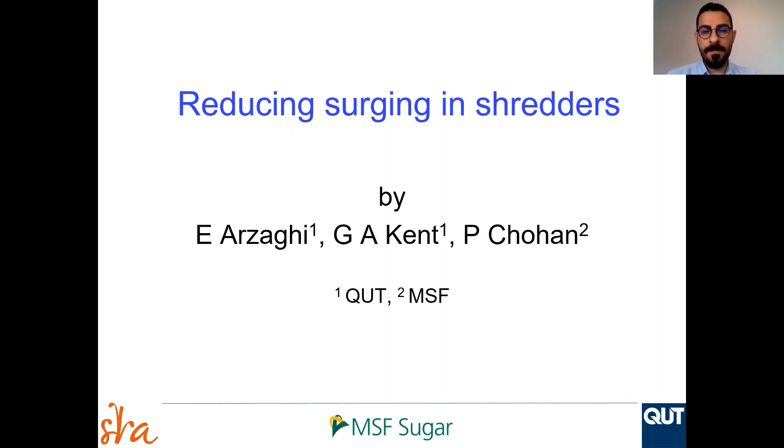Well, this project was initiated because of a specific problem at Tableland Mill, which is surging in the shredders. Surging in the shredder requires the mill to adjust the grid of the shredder to a wider distance, and that will in turn reduce the level of cane preparation below what we desire to have, which is causing a loss for every mill.

And basically, we would expect this problem to be more prevalent across the industry because the industry is trying to be more energy efficient by using electric motors. And electric motors are less forgiving when it comes to surging. Surging will significantly impact electric motors by reducing their lifespan, and it will turn into huge consequences for every mill.

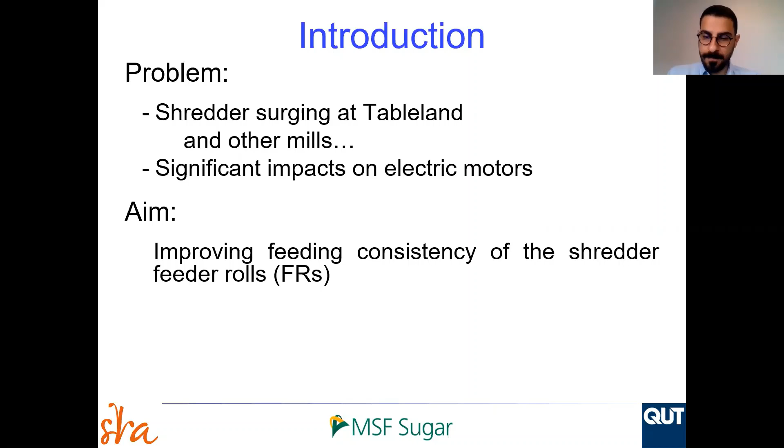So our aim is basically to improve feeding consistency of shredders using feeder rolls. To achieve that aim, we've set a few objectives, which are basically investigating current shredder capacity and comparison with industry standards for Tableland peak crush rates, and also modifying the setting and design of feeder rolls at Tableland Mill,

developing a theory of operation of shredder feeder rolls for us to be able to develop guidelines for design and operation of shredder feeder rolls. And we would like those guidelines to be applicable to other mills across the sugar milling industry.

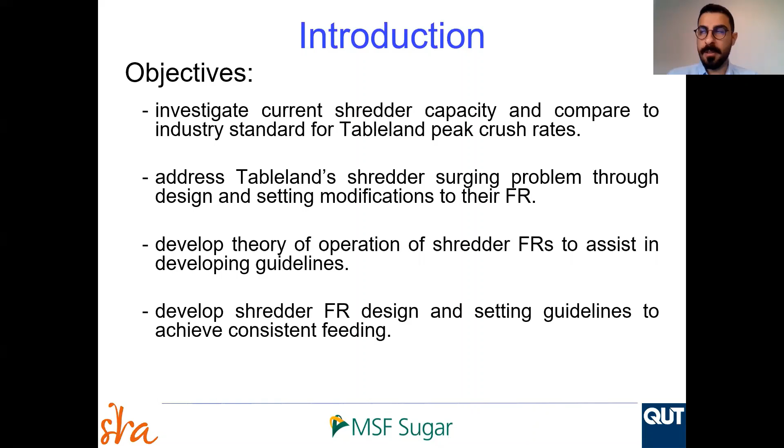Peter Chohan at Tableland has previously designed and built a model of the actual feeder roll, which is scaled down to 3.4 times smaller than the actual device. And the feeder roll has a 370 millimeter length. The feeder rolls are run by a variable speed drive, which is able to provide a maximum rotational speed of 6 rev per minute on the feeder rolls.

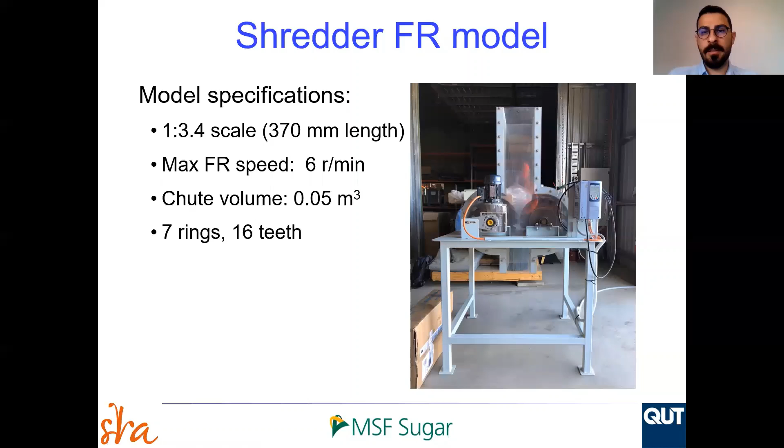As you can see in the picture here, the chute volume is around 50 liters. And with the current feeder rolls on the model, there are 7 rings of teeth, each ring having 16 teeth. We are planning to use this equipment for our experiment, but we would certainly need, and we are doing it at the moment, to modify it to be able to make variations in the design of the feeder roll.

Since the feeder roll is scaled down, we try to investigate how we can reflect on actual billet sizes that are being prepared before milling, and to be able to control the material size in terms of billet diameter and billet length. We have concluded to use timber dowels that will allow us to particularly select diameters and lengths that we want to try to run tests with.

However, there is an issue with using timber dowels, and that's a significantly lower density in comparison to actual cane billets. And to eradicate that issue, we try to see if we are able to soak dowels in water and see if we can increase the density.

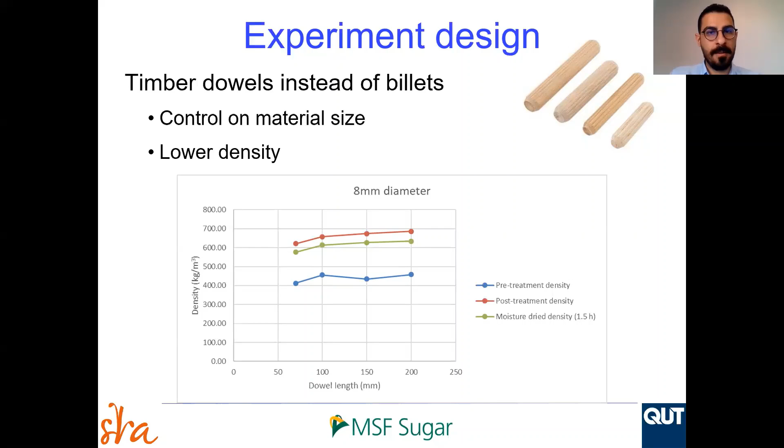To design the experiment, it was important for us to reflect on the actual design and operation of feeder rolls across Australian sugar mills. That's why we conducted a survey about different designs of feeder rolls and how they operate their equipment. 11 mills responded to our survey, and those are the mills that actually have feeder rolls on their shredder. And we have finalized the design of our experiment based on the responses we got.

And as you can see in this table, we are going to use a split plot to run the experiment. One of the parameters that are important for us is dowel size, and to have a good variation of sizes, we have planned to use 6mm, 8mm, and 10mm diameter dowels. And we are going to change the length of dowels at each treatment from 32mm to 50mm. The other parameter that we are going to change is feeder roll speed. And we're considering a good variation, which is 3 rev per minute and also 6 rev per minute.

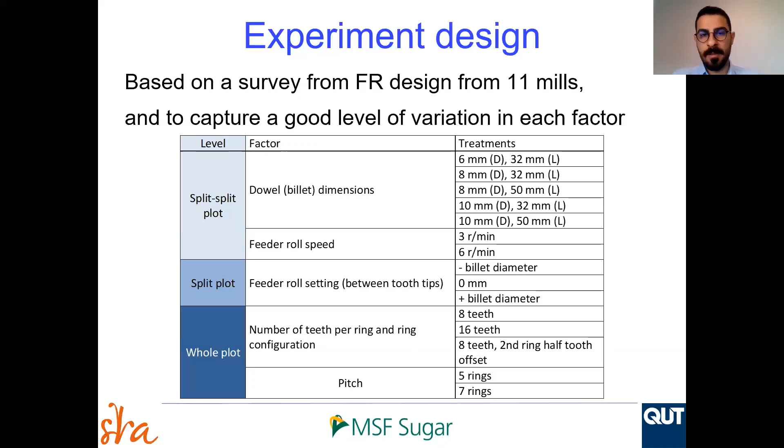We're also going to install 2 GoPro cameras, one just across the center line of the feeder rolls and one a little bit higher up around the chute height, to be able to see how feeding is actually done throughout the test.

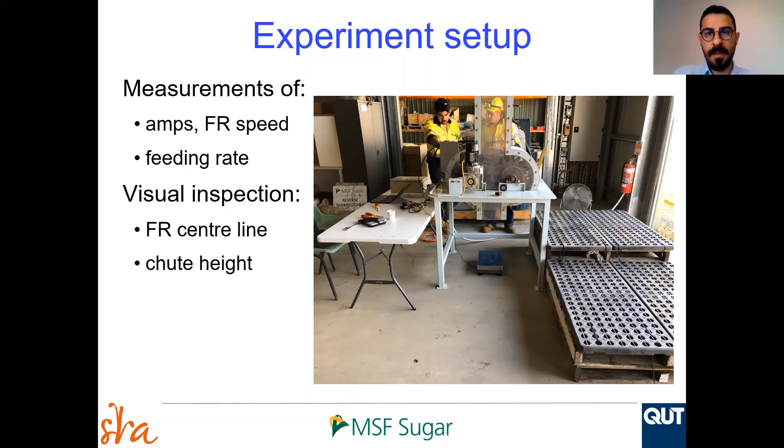We have set the model at Tableland a couple of weeks ago and did some preliminary test trials, but we actually used wood chips because we were not supplied with the dowels at that moment. We recorded the feeder roll speed and the current output from the VSD, and in a few seconds I'm going to show you a couple of trials that we have done. And this particular test was for the maximum speed of feeder roll, which was 6 rev per minute. I'm going to start the video now.

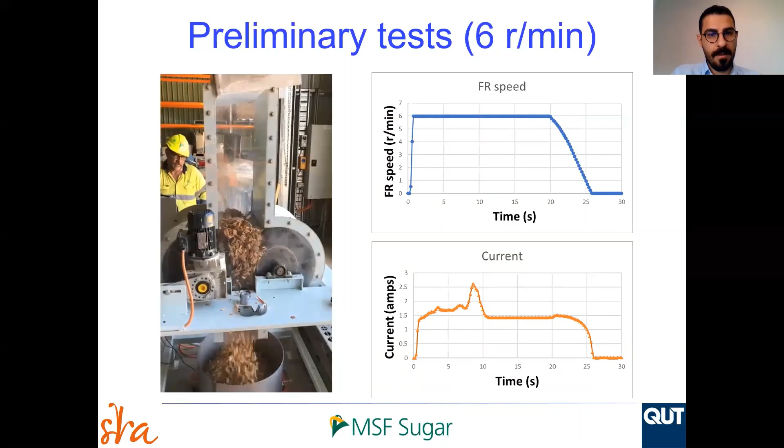The aim for this trial was basically to understand if we are able to acquire the data that we want, and also the variations and the changes in speed or current. And as you can see in the current, in the bottom plot, we have managed to capture the changes in amps throughout the test. And that is basically what we want to see for being able to measure power consumption and changes in that parameter.

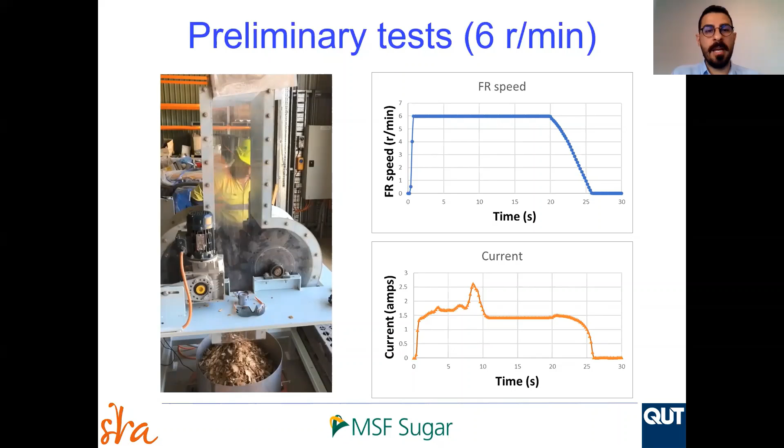The second one that we did, and it turned out to be very interesting, was with half of the speed of the previous test, which was 3 rev per minute. I'm going to start the video. So as you see, the feed rolls choked. We are yet unsure if it was because of the strange dimensions and texture of wood chips that we used, or actually the motors basically jammed because of lower speed and

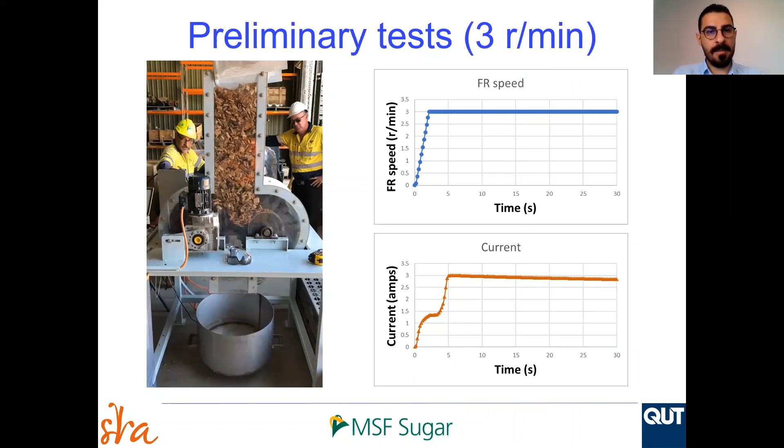not enough torque. And if I compare it to the previous slide, the average output current was around 1.5 amps, but when we had the choking, the amps increased from 1.5 to 3, and that shows that basically we are able to see the changes and understand where the problem starts.

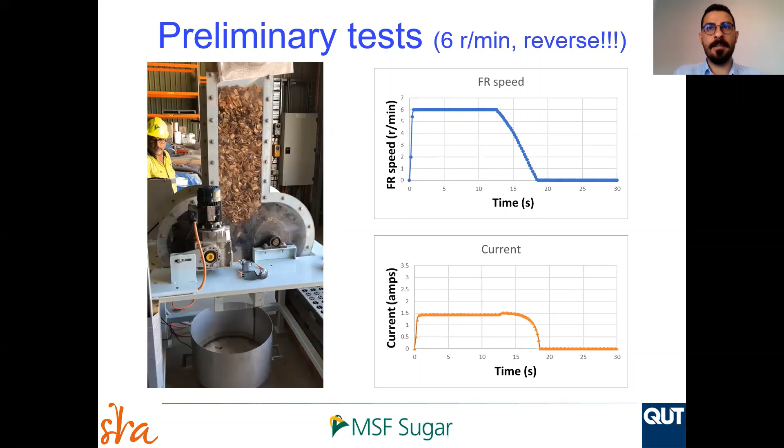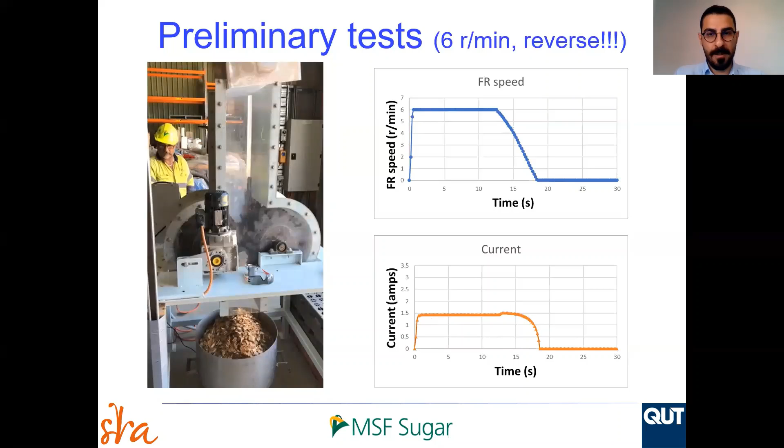The last video that I'm going to show you is basically when we try to understand what is going to happen if we change the rotation direction of the feed rolls. And I'll let you see what is happening. You can see that there is a significant damping effect when we try to reverse the direction of feed roll rotation, but as far as the parameter observation goes, the test has been very nice on amps and speed of feed rolls.

So the future steps are basically to complete the experiment, reflecting on the parameters that we are planning to change. Once we complete the experiment, we will statistically analyze the results to see the significant effects of each parameter on power consumption and feeding rate. The next step will be to develop guidelines for feeder roll design and operation that will be performed based on the theories that are available for 2-roll mill design and operation from Dr.

Kent's thesis. After that, we are going to implement the changes based on the guidelines we've developed at Tableland Shredder. By comparing power consumption on the shredder before and after the changes are applied, we are going to make judgments of how effective the guidelines are and make necessary recommendations. And we are hoping that the result of this study will help other mills with feeder rolls to improve their operation and benefit from the results.

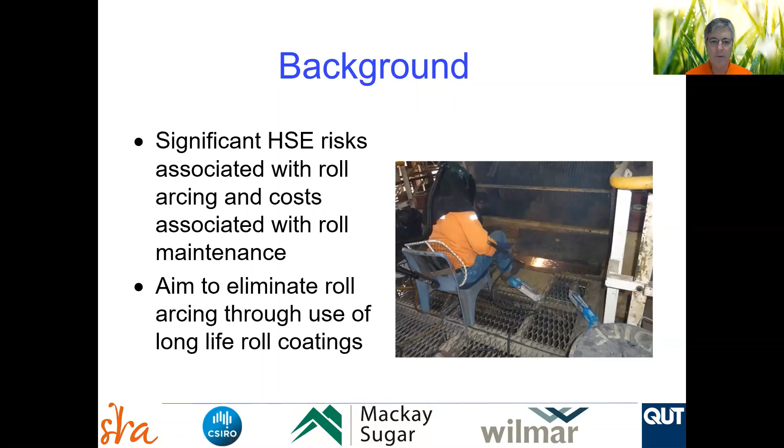What we're trying to do, as the title suggests, is to get to the stage of actually eliminating roll arcing through the use of long life roll coatings, a topic that we've been working our way towards for quite a few years. The two technologies that we have available have been worked on since the 1990s.

Firstly, the tungsten carbide chips for putting a rough and durable coating on the groove tips has been around since the 1990s. And in our previous project that finished a couple of years ago, we looked at the idea of using laser cladding to put a durable coating on the flanks of roll grooves.

And so in this project, the objective was to have a go at both different techniques and to see whether either or both of these technologies can give us a better all-round result in terms of the ultimate costs of maintaining the roll surface.

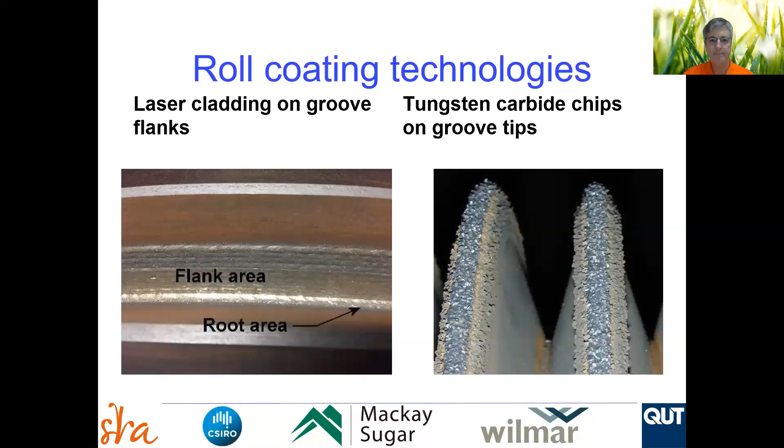So if we look at the project objectives, we're looking for the coating technology, as I just said, that minimises the roll shell maintenance costs. And I'm using the word costs in a very general sense because I include the health, safety and environmental risk costs as well as the easily defined direct costs.

From the previous work we've done, one of the biggest limitations is not so much on tungsten carbide, because we've done that before, but determining service life. And when you're looking at the economics of spending additional money up front to prepare the surface for the season, you need to get a certain life out of that surface to be able to justify that cost. And the laser cladding is something we have not yet had a chance to look at in service.

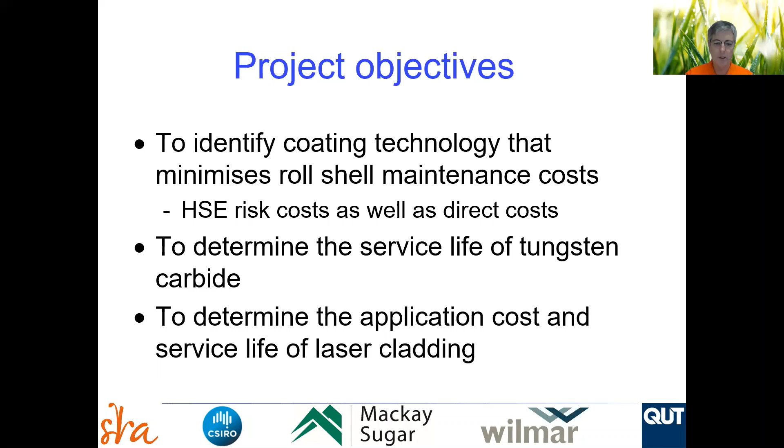So as I said, this project only started 4 weeks ago, and what we have planned for this year, and we've started doing already, is the first 2 stages of the work. The first stage is a baseline evaluation. So it's really about us trying to gain a good understanding of the true costs of the current roll arcing process and the other roll shell maintenance costs that are currently sustained.

The second part of this project is associated with the preparation of a roll to go into service at Racecourse Mill this year. So firstly, just talking about the baseline evaluation, this work is getting close to completion. We did start late last year in terms of providing a survey to go to each of the milling companies to seek out the actual costs of roll shell maintenance. And we did get responses from six companies, covering a total of 15 mills, which was nice to see.

We followed that up last week with some interviews at Racecourse and Pioneer Mills to try and quantify the other costs. So this is where we're trying to get down into the difficult territory of trying to assess what the real costs are associated with health, safety and environment. And to do that, we spoke to a number of roll arcers themselves. We spoke to other people who work around the milling station, like roving drivers, console operators, shift supervisors.

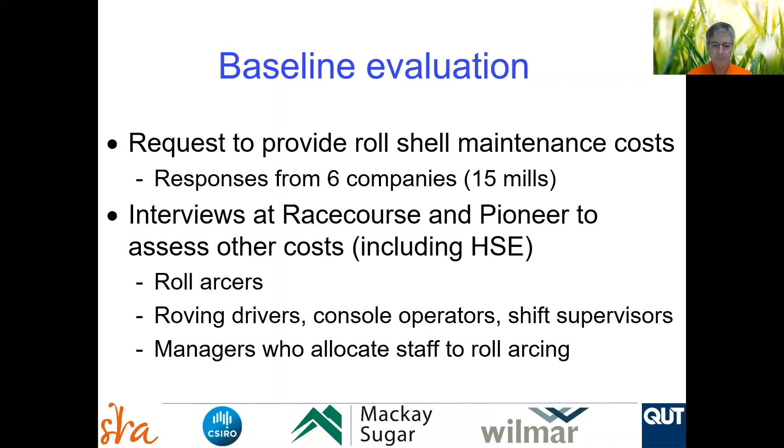Now, moving on to the roll preparation task, we are planning to coat the Racecourse number 5 top roll. Number 5 mill at Racecourse is a 6-foot mill, doing 500 tonnes an hour. So it's a reasonably significant duty. The experiment itself, and this is a plan that got updated yesterday. So I'm actually at Racecourse Mill at the moment, and we've been working since the beginning of last week trying to get this roll preparation work underway.

The plan at the moment is to look at 3 cladding materials on the flanks of grooves, and also look at the case of not putting any cladding on the sides of the grooves. In terms of the tungsten carbide, we're going to put it around the tips of the grooves. We're looking at either 3, 5 or 7 runs of tungsten. So with 3, what we're talking about is one run around the tips of the grooves and 1 on either side, going up to 7, which is one run on the tip and 3 runs on either side.

So when you're looking at 4 different cladding treatments, 3 cladding plus no cladding, and 3 different treatments of tungsten carbide, 4 times 3 is 12. So we've got 12 experimental grooves that we'll be assessing this year on this one roller.

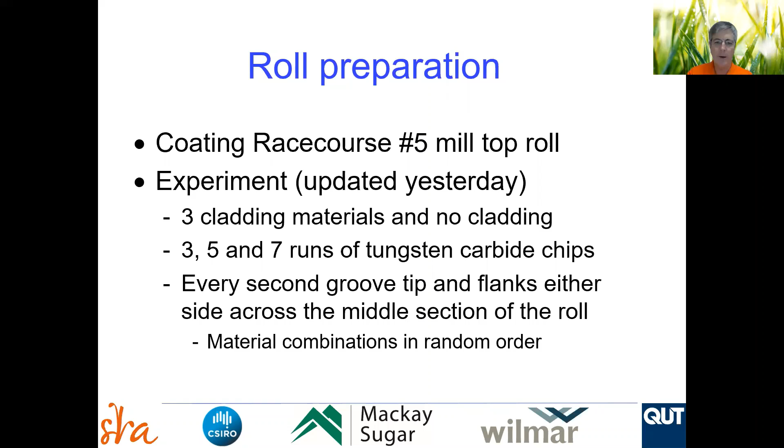Okay, we were going along very nicely until Monday this week, and the coronavirus eventually caught up with us, unfortunately. We were within a day or two of being ready to start laser cladding, when unfortunately the CSIRO staff we had with us up from Melbourne were recalled by CSIRO due to the various risks associated with the virus. So that's caused a change in plans that we're currently seeking approval for with SRA.

But essentially what we have planned is to replace the laser cladding on the sides of the grooves with cladding using MIG welding, which is a process that SWP have been working on in the last couple of years. It was a process that we didn't think was suitable for the task when we designed this project originally, but we did plan up until yesterday to have one MIG welding coating to compare against the laser cladding, but now our plan is to use MIG welding for all of the treatments.

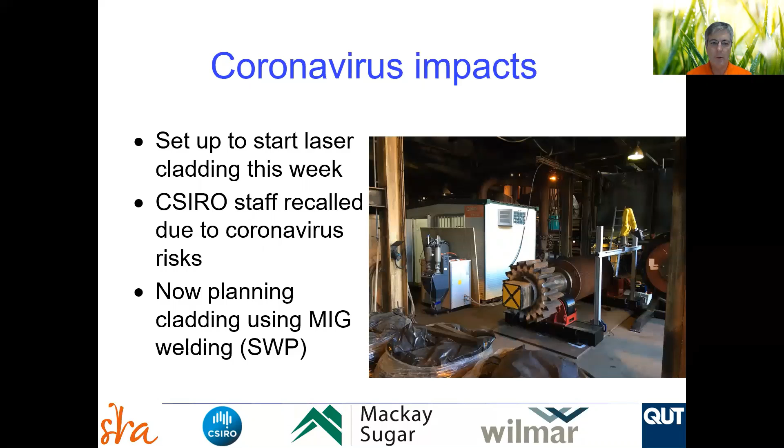So we are also planning to do some comparisons to other roll shell treatments. We have a number of different cases to consider. At Racecourse, we have, I guess, a convenience of having 3 6-foot mills, one after the other in the milling train, and they are all different. So Racecourse number 3 top roll this year, the shell is from Bundaberg Walker's Material A, grey cast iron Material A. It's going to be conventionally arced. Racecourse number 4 top roll is Bundaberg Walker's Material B, also going to be arced.

And we are also going to do a comparison with Plane Creek's number 5 top roll. So Plane Creek being the mill adjacent to Racecourse, fairly similar rate, and I guess the bigger difference is that it's a 7-foot mill rather than a 6-foot mill. But one of the advantages of it is it is going to have tungsten carbide on the tips, and I understand it's also going to be clad on the flanks. So that will be an interesting comparison, given that it is a Bundaberg Walker's Material B roll compared with our Racecourse number 5 top roll, which is an SG iron roll.

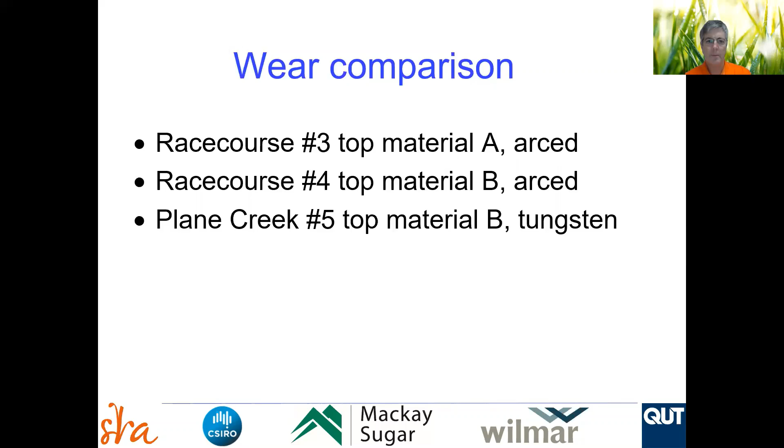So where we're at, the first real milestone, milestone 2, covers the baseline evaluation. It's due on the 1st of April, and we're working as hard as we can to meet that milestone. And then we have the following milestone, which covers the preparation of the Racecourse number 5 top roll. And our objective, of course, is to get that roll into service this year. And it's also to do some measurements, not just of diameter, but also of the groove profile of each of these 4 rolls, so that we've got something to compare against at the end of the season. And that milestone's due on the 1st of August.

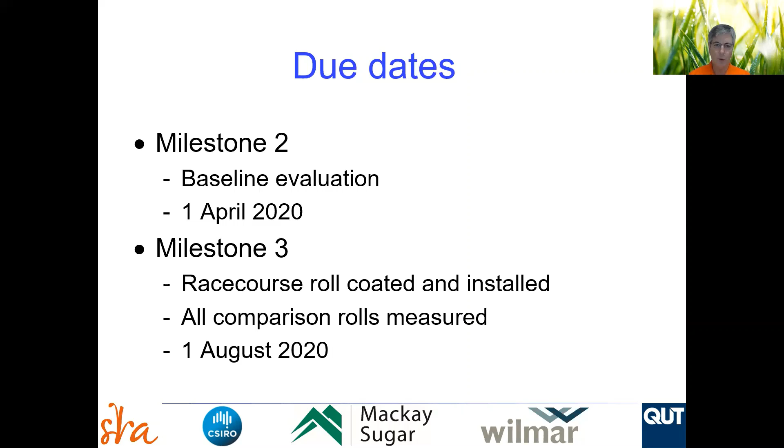So just a few extra acknowledgements. I couldn't fit everyone onto the co-author list. From Mackay Sugar, Marty Iten has done a brilliant job in terms of organising our cladding facility. As you saw in the photo earlier, it's pretty much all set up and ready to go. Magella Daly is the HSE coordinator here, who's had a fair input into preparations for the work we're doing.

The CSIRO team, Tony Kilpatrick, Con Philippou and Hans Law, have been up here preparing for the laser cladding. Unfortunately, we didn't quite get to the point of utilising them. And Dale Johansson from SWP, who'll be doing the tungsten carbide and MIG welding for this season. And also a big thank you to Glenn O'Malley from Wilmar, who organised the interview process at Pioneer last week. And of course the funding for the project from Sugar Research Australia.

Okay, thanks. I'm guessing all roll shells under trial have a 1.5 inch or 40 millimeter pitch times 35-degree grooving. Is that right? Yes, that's correct. I think that's correct for most of them. I've got Steve McLaughlin from Racecourse here with me, so I might just push the camera around in his direction. Yeah, number 5 top at Racecourse, it's a 38.1 millimetre.

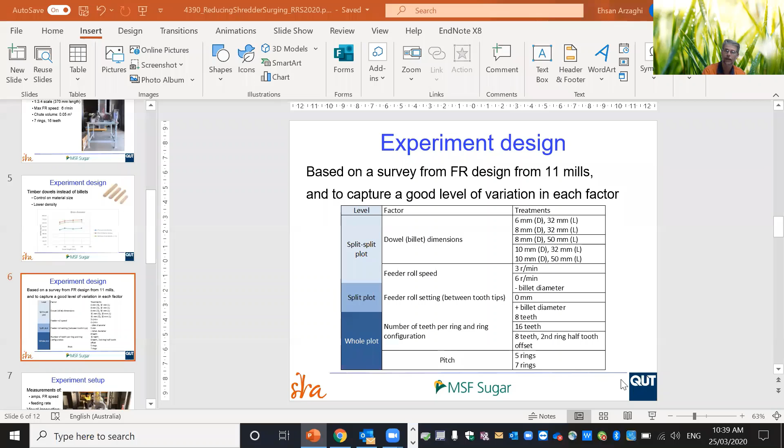Microphone, please. Thank you. How's that? Better. That through okay? Yes, thank you.

Beauty. Yeah, it's a 38.1 millimetre pitch and 35-degree angle on the vessel groove pattern, tooth on centre for Racecourse number 5 top. And number 3 and number 4 are identical to that at Racecourse. Thanks, Steve. And I understand that the number 5 top roll at Plain Creek is also 38 millimetres.